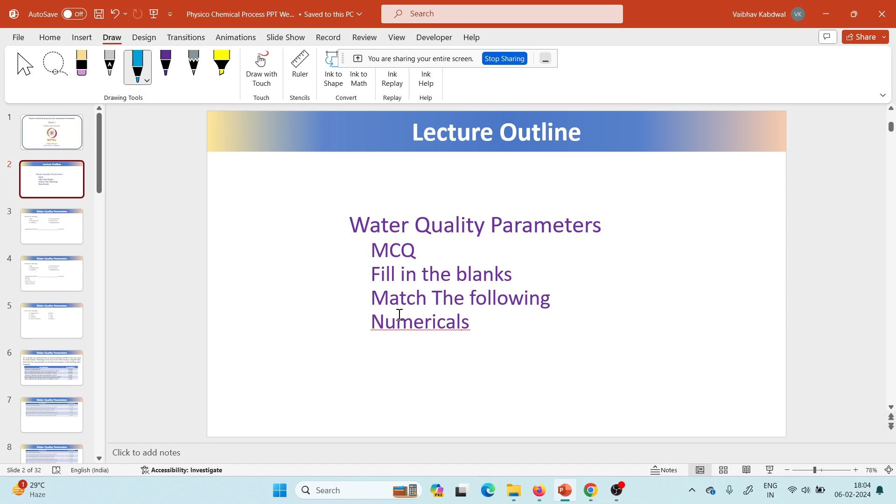We will study water quality parameters in this lecture. In the NPTEL lectures, Sir has taught water quality parameters, and I will solve some questions here. We will solve MCQ, fill in the blanks, match the following, and numericals. Shall we start? Yeah, sure, sir.

Okay, thank you. So did you watch the videos which Sir has uploaded? Yes sir, I watched some of the videos. I have previous knowledge, based on that I submitted my assignment. So are you a bachelor's, master's, or PhD scholar? Can I know? I am master's, I have a master's degree, sir, in organic chemistry. Nice. Okay, so good. We will start, I think maybe more people, if they want to join, they will join later.

So this is the question, as follows. We will see how to check pH, temperature, and turbidity, and through which instrument. So can you think of the first question?

pH can be measured through an ionic tester, sir. Correct. Turbidity through nephelometer. pH through ionic tester, temperature through thermometer, turbidity through nephelometer.

Correct. And temperature affects... there are actually four variables which can be affected by temperature. Can you think of those things? Dissolved oxygen. Yeah, correct, there are many things also. Maybe pH also may vary at temperature, I think it won't affect.

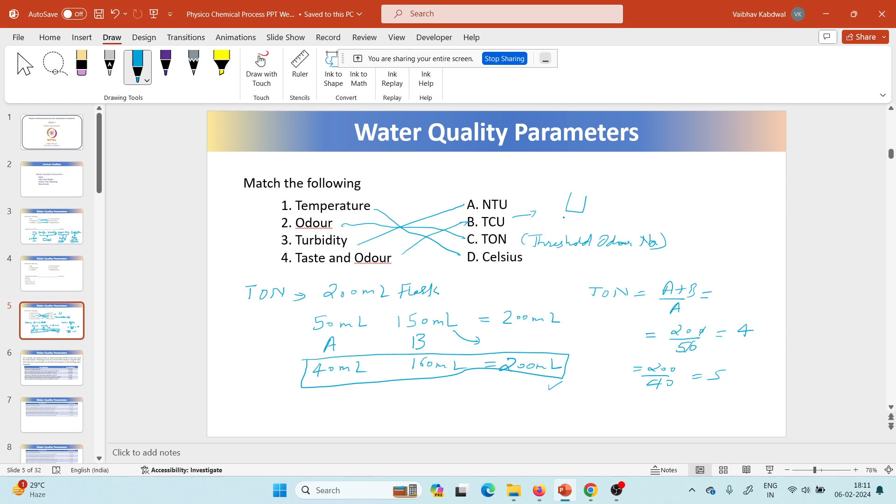Now we will solve one question. This is about solids. Do you know what solids are in water or wastewater?

They may be organic and inorganic solids. Correct, anything else? Organics, inorganics. Yeah, these are organics and inorganics. Dissolved and suspended - are you aware?

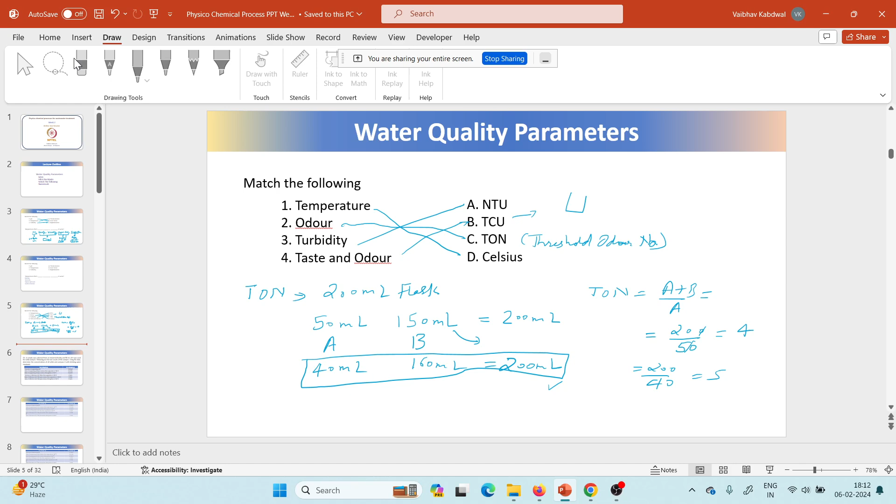Dissolved solids we can measure by means of specific conductivity. And suspended, how will you measure? I don't know, sir. Correct, I will tell you.

See, there are solids. Solids have a range that I have taught in previous lecture. So solids we can define as any impurity in water which can affect the water quality. So that's simply how I'm defining it.

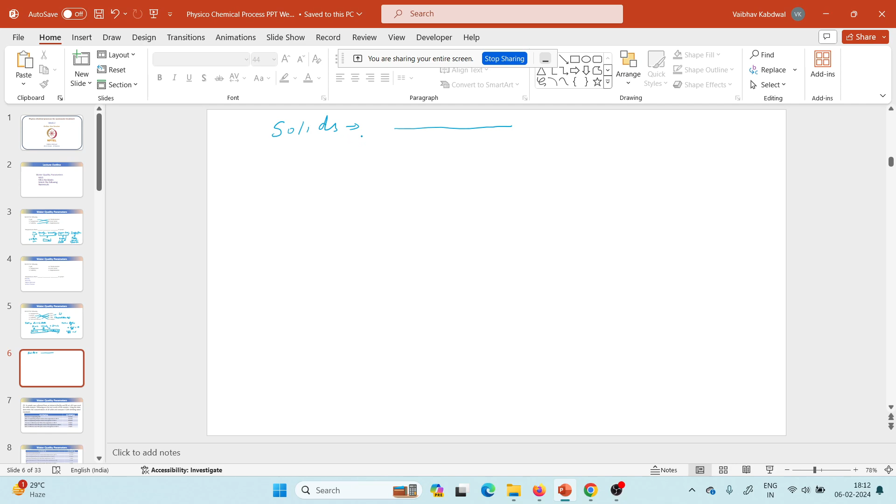Now we'll talk about the measurement. Solids, as we have defined, some are suspended solids and some will be dissolved solids. And we have defined further that suspended solids can be inorganic suspended solids, and it can be organic suspended solids.

Let me give you an example of inorganic suspended solids - let's say clay or sand. Organic suspended solids, can you tell me? Just like it can be leaf or any other thing.

Likewise, we have defined dissolved solids in two categories: inorganic dissolved solids and organic dissolved solids. Organic dissolved solids, let's say like sugar.

Inorganic dissolved solids, can you give the example? Urea. Urea is organic, not inorganic. Any salt you take, that is inorganic dissolved. Like sodium chloride, potassium chloride.

So how many varieties? One, two, three, four. We have a few more varieties. We will talk about those solids in the question itself. One, two, three, four, five, six - there are two more varieties left.

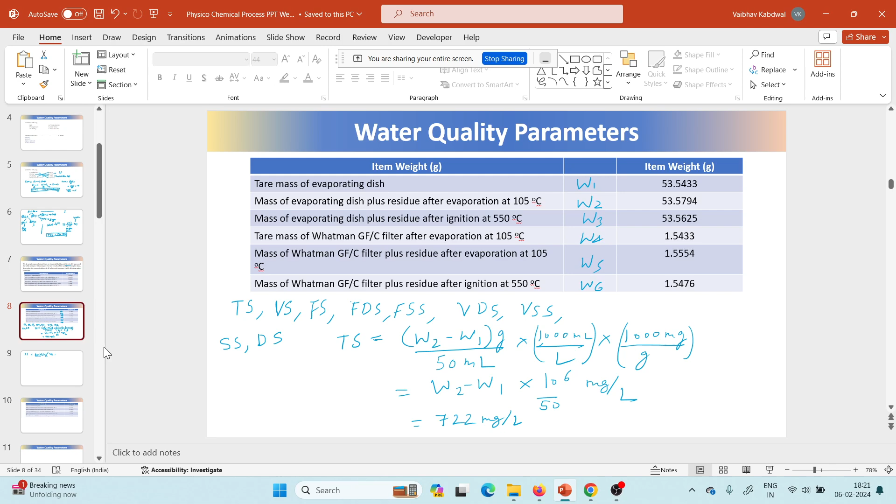Have you actually copied the question or not? No sir. Okay, 53.5625 minus 53.5433 - sir it's around 384, correct, correct. It is 384 milligram per liter.

Fixed solids are also called inorganic solids. Now we will calculate total suspended solids.

It will be W5 minus W4 into the same 10 to the power 6 divided by 50, milligram per liter. If you solve it, you will get 242 milligram per liter.

And if you solve the TDS, it will be total solids minus total suspended solids. It will be 480 milligram per liter.

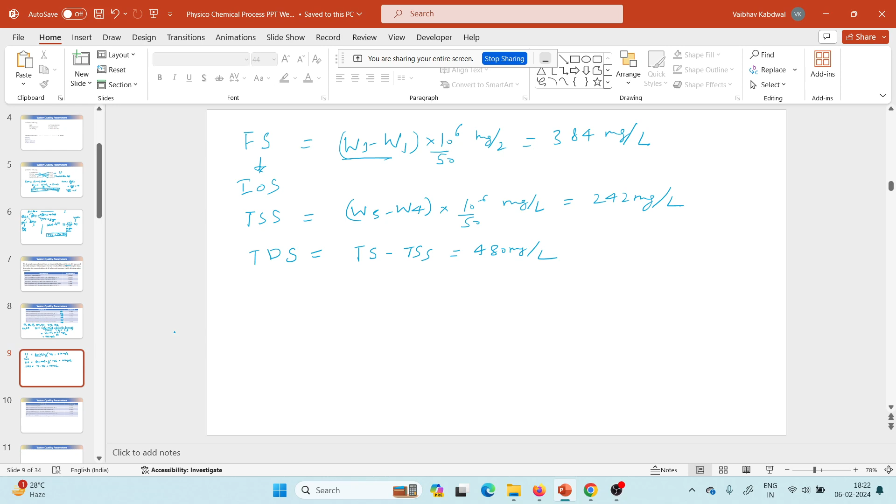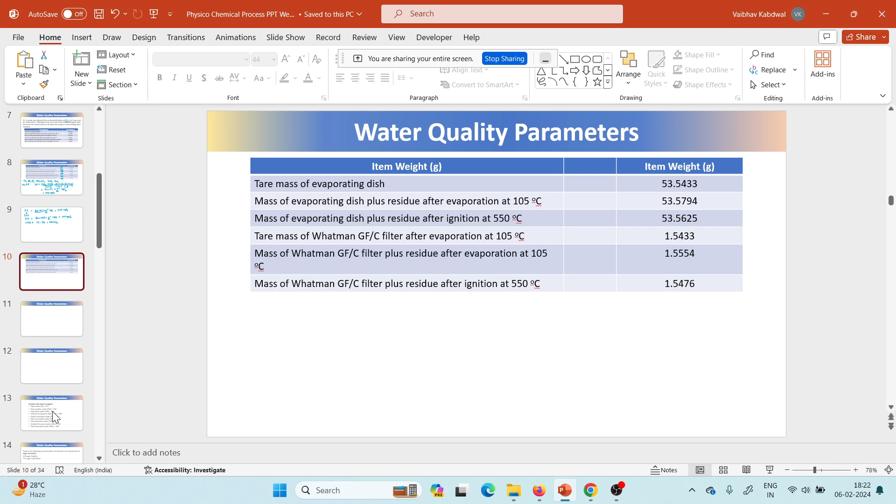Likewise you can do the rest - if you do it, it will take more time. So I have solved this concept now, I have told this concept, so if you use this concept, you can solve it and the answer you will get is also here. Otherwise you will lose interest if you solve too much. So this is the answer, you can match after that.

Okay, you will solve some small questions. So like this thing you can try: express the following concentration of elements and compounds as milligram per liter. These are actually compounds only, I have removed the elements. These are very easy, so can you try it?

No sir, okay I will try. So what we have to do is express the following concentration of compounds as milligram per liter of CaCO3. So we have to express it in terms of CaCO3. So how to do it?

There is a concept called equivalent. So what we have to do is find the equivalents of one compound, and that much amount of equivalent will be of CaCO3 only. So I will find first, I will calculate this.

Can you calculate the molecular weight of MgSO4? Just a minute, take 24 as Mg. Tell me this. 120 sir. Yeah, so it will be 120 grams.

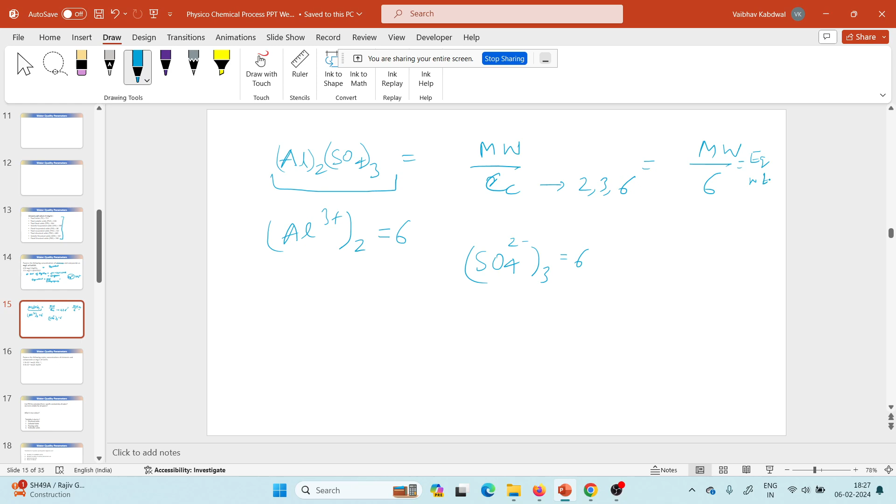It will be the equivalent weight of Al2(SO4)3. Understood now? Yes, sir. So likewise, we will solve one question.

So for this, it will be 120 divided by how much? 2. It will be 60. 60 grams. Now we will calculate the number of equivalents, that is equivalent weight.

For MgSO4, sir, or Al2(SO4)3 types? No, first we will do it for MgSO4. Al2(SO4)3, I just told for reference how to calculate. For MgSO4 only.

Hi, yes, I can hear you. Hello. If you have doubt, you can text also. Hello. Yes, yes, yes. Then, yes, sir. So shall I start? Yes, sir.

Okay, so equivalents. We have calculated the equivalent weight. Now we will calculate the number of equivalents or gram equivalents. It is sometimes called equivalent or sometimes gram equivalents.

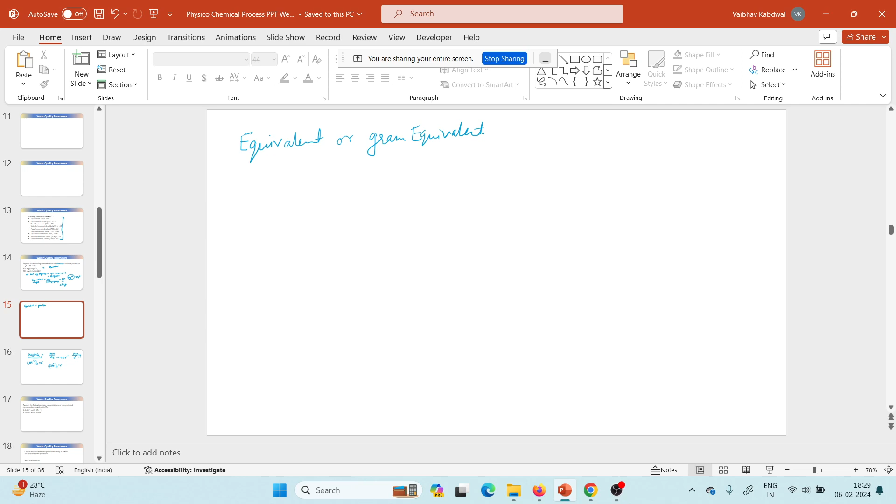Gram equivalents is given weight divided by equivalent weight. For MgSO4, the given weight was how much? It was 420. So we will take 420 and divide it by equivalent weight.

How much was it? 60 now. So it will be... but it was in milligram, we have to take care of that.

7, I think. Yes, sir. 7 into 10 to the power minus 3. So it will be equivalents, or we can write it as 7 milliequivalents. Understood? Okay, sir. And then we have to convert it in the form of CaCO3.

So we have 7 milliequivalents of MgSO4. Same 7 milliequivalents we will have for CaCO3. Okay, sir. So now we need to calculate for CaCO3.

So what is the molecular weight of CaCO3? 100. 100 grams or milligrams? Grams only, 100 grams. What is the equivalent weight? 100 divided by 2, it will be 50 grams. So in one equivalent, there will be 50 grams.

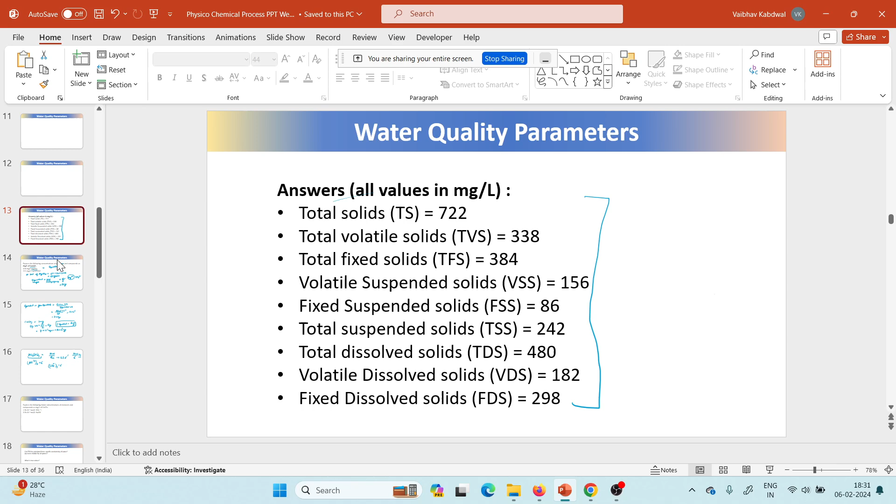So in 7 milliequivalents, it will be 7 into 10 to the power minus 3. I'm writing it in the form of equivalents, and then 50, and then converting it in the form of milligram. It was 420 milligram per liter. So 10 to the power minus 3 will cut and it will be 350 milligram per liter.

Fine. So now can you solve the same for this thing also? 221 milligram per liter of Ca(HCO3)2. It's easy only. Take 1 or 2 minutes and try to solve.

So what is the molecular weight of Ca(HCO3)2? I'm calculating, sir. Correct, correct. Good. It's around 161, sir, 162 I think. Can you cross check it again? Yes, sir, it's 162.

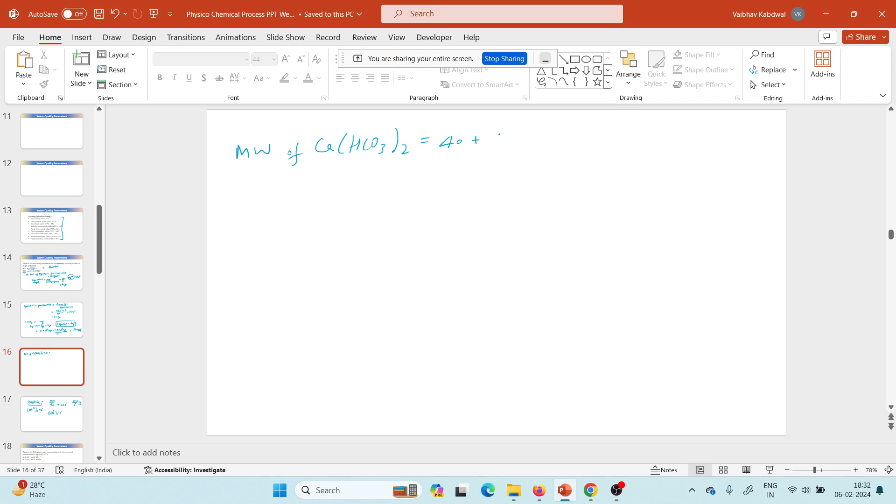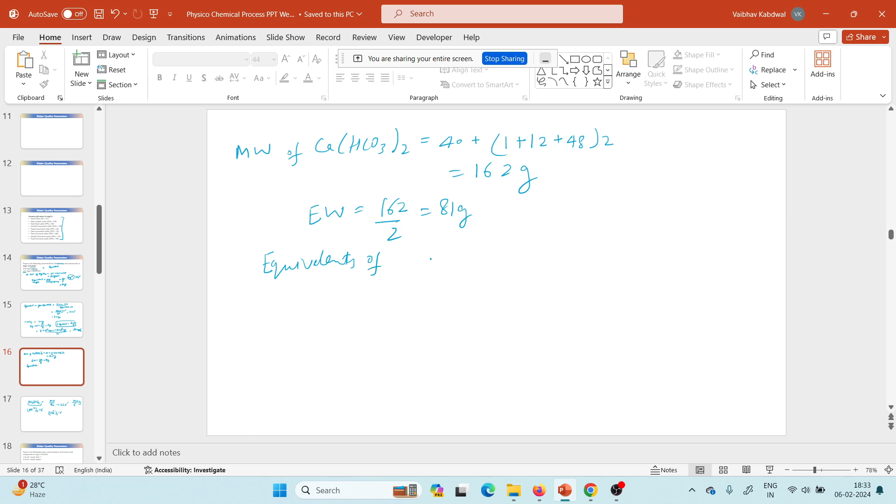Plus 60. 162. 81. 2 point.

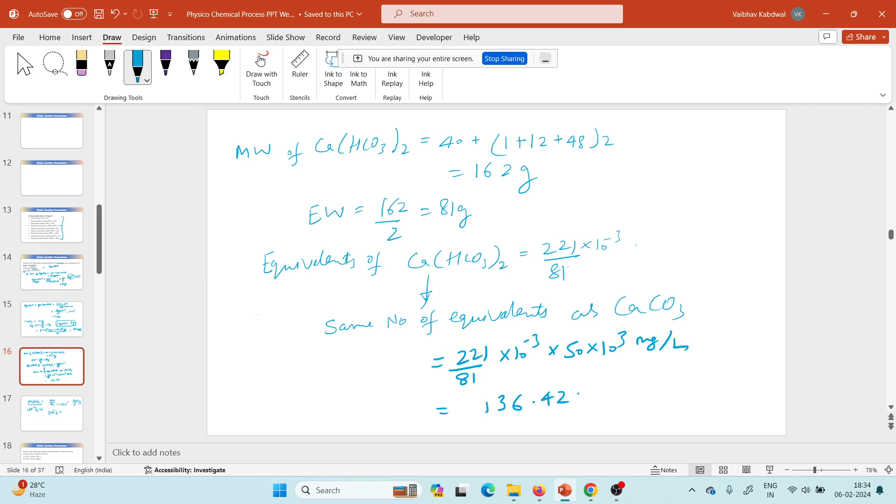Have you calculated? Check. Yes sir, correct.

Okay, so likewise we will solve this also. We have to solve it in the same manner. Express the following molar concentrations of elements and compounds as milligram per liter. I've removed the elements, otherwise it would be big. So for these compounds, we need to calculate the same thing.

It is easy here because we know one formula: normality equals combining capacity into molarity. Can you tell what is this thing? Cc is actually combining capacity, which we studied previously. So if you know the molarity, you can convert that into normality by multiplying it with combining capacity.

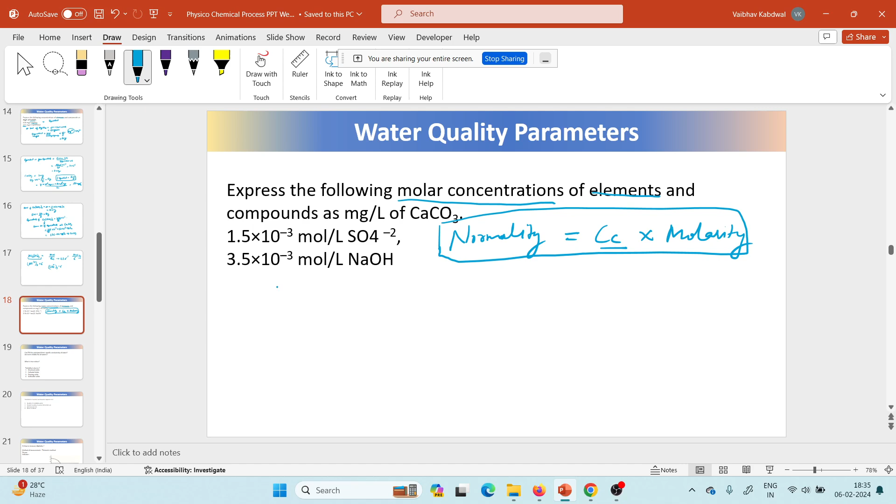So for SO4 2-minus, combining capacity will be 2, and normality will be 2 into 1.5 into 10 to the power minus 3, which is 3 into 10 to the power minus 3. Normality units are in normal.

It will be 150 milligram per liter. Okay sir, correct? For the other question, wait, I will add one more.

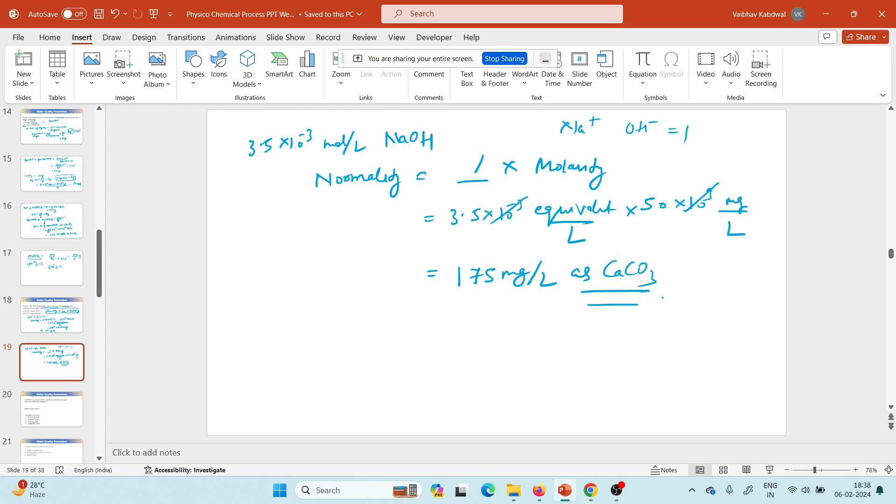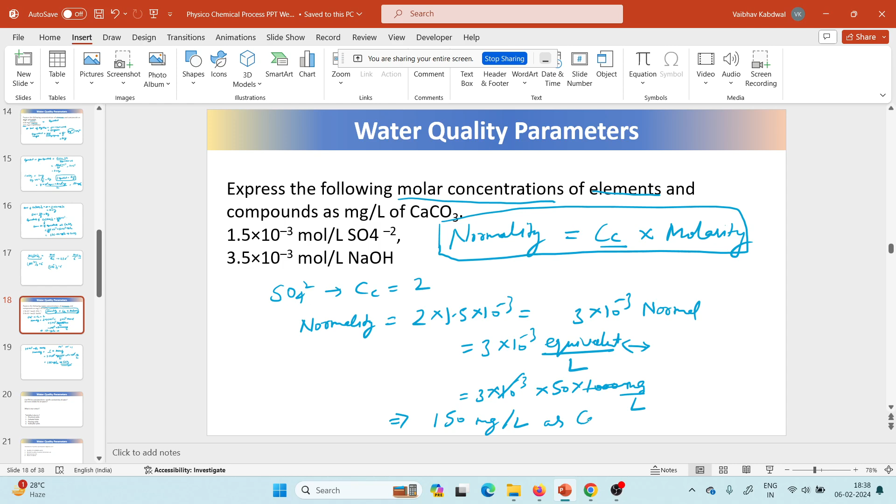If we don't define it as CaCO3, then our answer may not be correct. So it should be written as 150 milligram per liter as CaCO3.

Then these are some small questions that you must read. Can TDS be calculated from specific conductivity of water? Yes sir, it's true. And what about the second question: are tests reliable for all waters?

I didn't understand the question, sir. First question, did you understand? Yes, sir. I am not understanding the second question. Okay, okay, that's why it is there. Okay, I will tell.

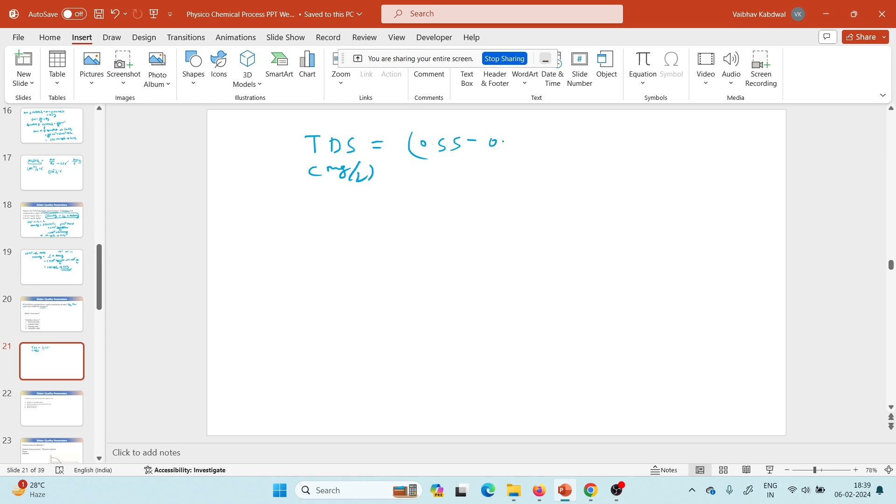See, TDS, how will we calculate? We will calculate TDS in milligram per liter by multiplying it with a factor which ranges from 0.55 to 0.7 into specific conductivity. Okay sir, correct? Sir, I think it's 0.6 something.

Yesterday I have answered it. Yeah, it's 0.67, but for different waters and different ions, it will vary. So specific conductivity is micromho per centimeter, that is, or millimho. That I am not sure.

So the thing is that there is a limitation not with specific conductivity but with TDS, because what will this term tell? It will tell us the ionic species concentration.

So what we have studied, TDS will contain inorganic dissolved solids and organic dissolved solids. So what will specific conductivity measure? It will measure only inorganic dissolved solids. Understood somewhat? Yes, sir. So it will tell only inorganic dissolved solids, and organic dissolved solids will not be counted here.

So that's why in those waters where inorganic dissolved solids are more and organic dissolved solids are less, there we can use it. But in our wastewater, organic dissolved solids are more, so we can't measure TDS through this equation.

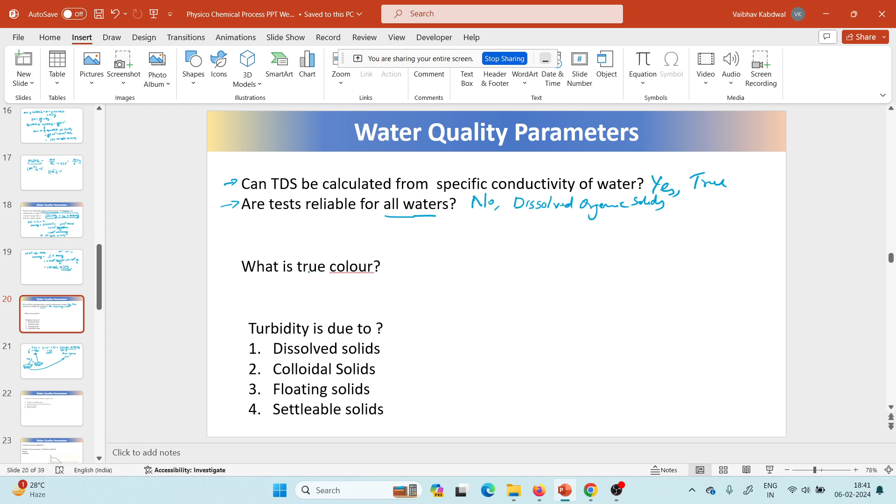What is true color? Do you know? No, sir, we will measure the color by comparison method, haven't seen it, sir.

In water or wastewater, there are two types of color: one is apparent color, and another is true color. True color is only due to dissolved solids. Water can have dissolved solids and suspended solids. Apparent color is due to both dissolved and suspended solids. So if we remove the suspended solids, we will get the true color.

Turbidity is due to suspended solids, but not all suspended solids cause turbidity. These are specific solids called colloidal solids, and colloidal particles will cause turbidity through scattering. Floating solids like leaves and other materials in wastewater will not cause turbidity.

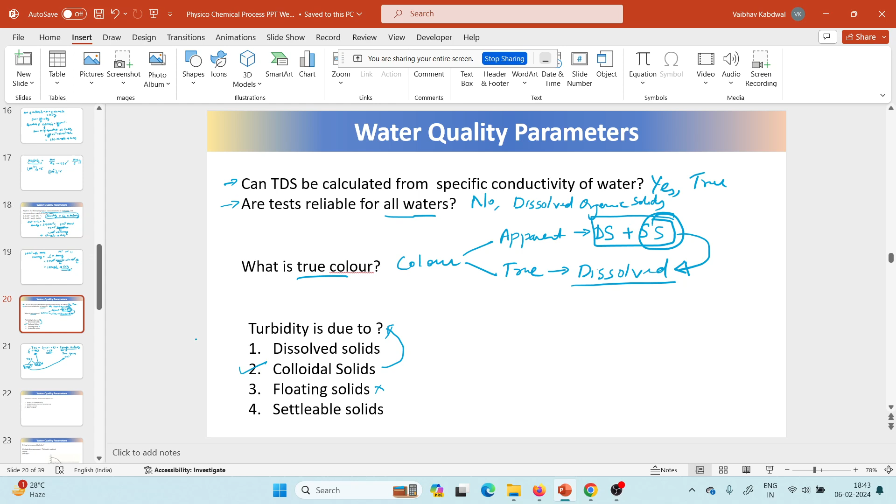Do you know how to measure alkalinity and what is alkalinity actually? The neutralizing capacity of water, acid neutralizing capacity.

Do you know how to measure it? Yes sir, titrimetric method we use. Which titrant do we use? Sulfuric acid. How much do we use generally? 0.02 normal H2SO4. Indicator? For hydroxide alkalinity, it is phenolphthalein.

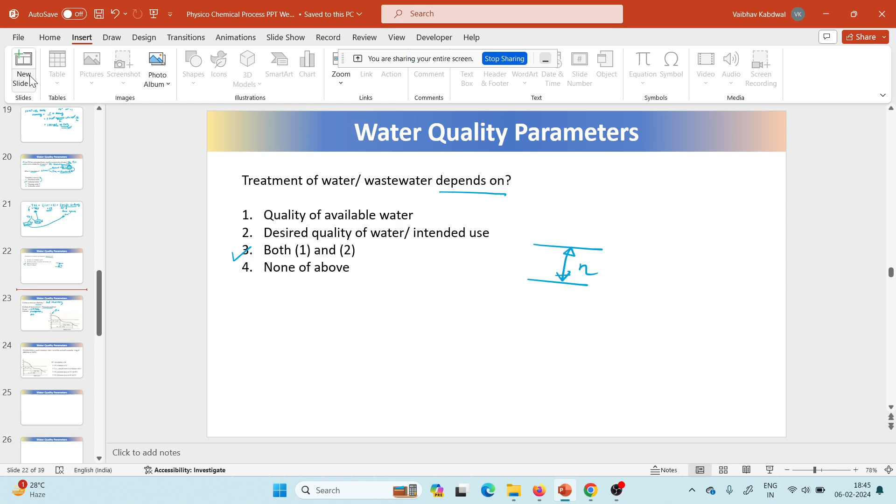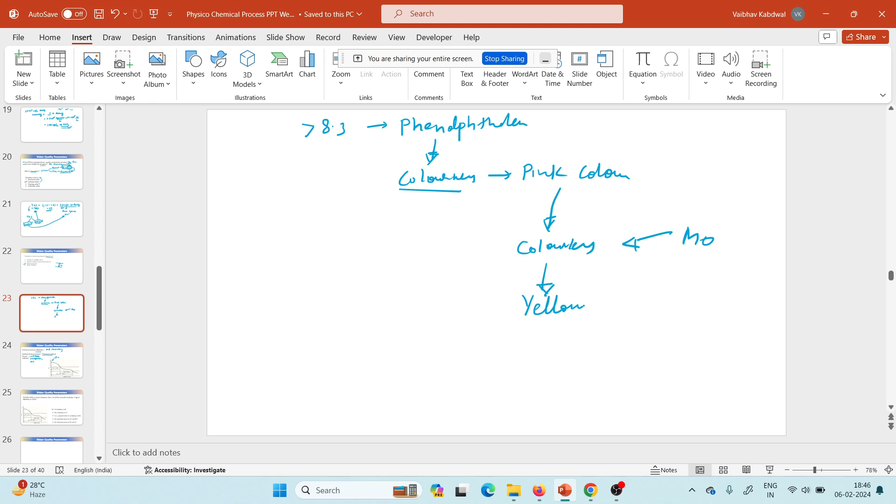So what we use in general: we add phenolphthalein alkalinity, denoting it as P. It will turn if the pH is more than 8.3, even though if it is not more than 8.3, we will add phenolphthalein. Phenolphthalein will commence with hydroxide and give pink color if water is colorless and pH is more than 8.3. After titration, the pink color changes to colorless. So we will titrate it with 0.02 normal H2SO4, the pink color will turn into colorless, and then we will add methyl orange. Then the color will change to yellow, pale yellow in color, and then we'll titrate.

Just a minute sir. Hello sir, okay. Okay sir, I understand it sir. So from pale yellow it will convert to orange or reddish tinge color, sir. Orange, or a little bit light pink. So this is the procedure.

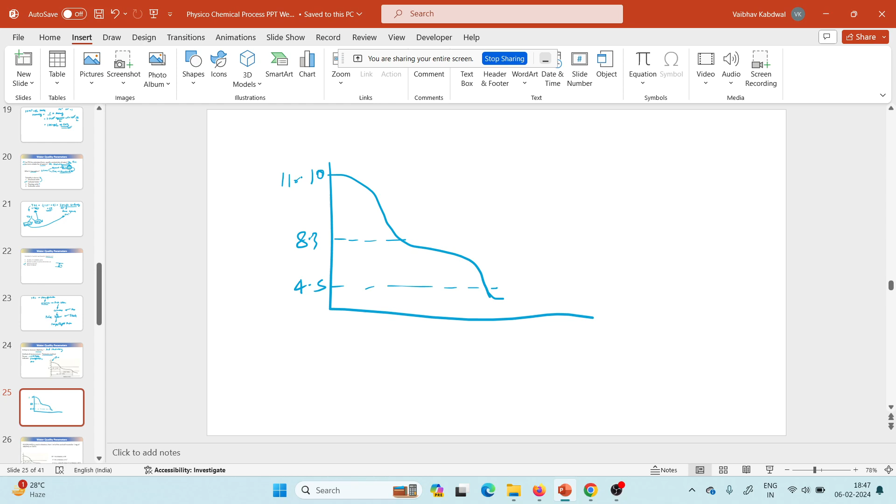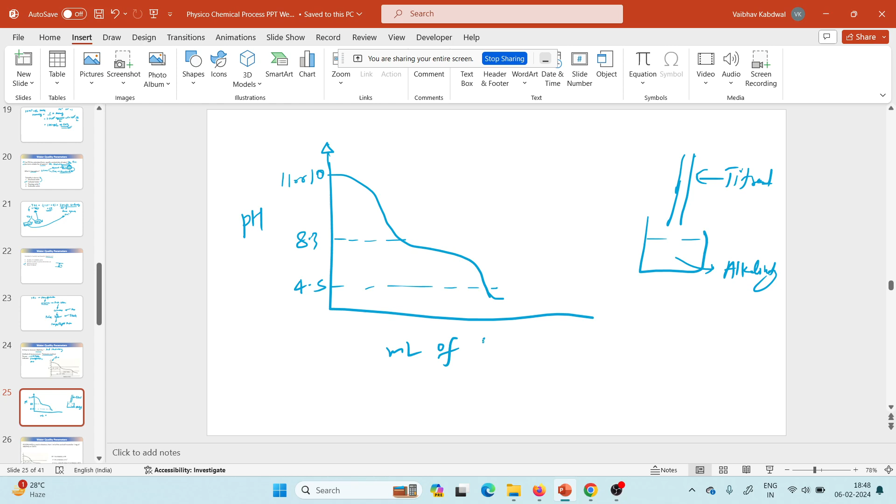I will teach this with a graph. First we add phenolphthalein, then we add methyl orange. This pH will be 8.3, this point will be 4.5. This will be around more than 8.3, let's say around 10, 11, or over 10. On the y-axis we measure pH, and we measure the volume of titrant used on the x-axis. So this water will have some alkalinity, measured in ml of titrant used.

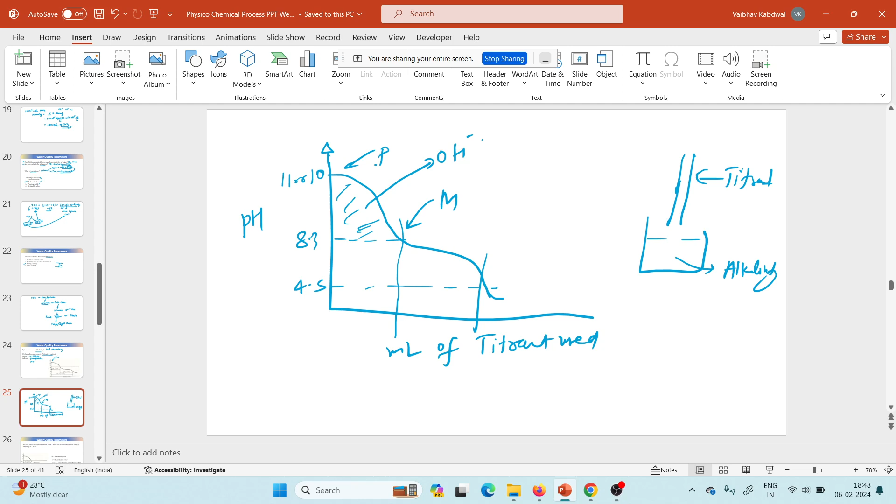So we will put phenolphthalein, then we switch to methyl orange when the phenolphthalein color disappears. In this first region, only OH minus and CO3 2-minus alkalinity species are present. In the next region, bicarbonates are present as HCO3 minus. The amount of H2SO4 consumed in the first region is called phenolphthalein alkalinity, and from phenolphthalein region to the end, it is called methyl orange alkalinity. The total alkalinity M is taken from initial to final; this is also called total alkalinity.

One more thing let me tell you. So here pH will be 8.3... oh no, let's say pH is around 11, then 8.3, then it will be 4.5.

So this we call as P, phenolphthalein. Then we call this as M. And now we'll talk about species. So here we will have OH minus hydroxide and CO3 2 minus, and here it will be bicarbonates.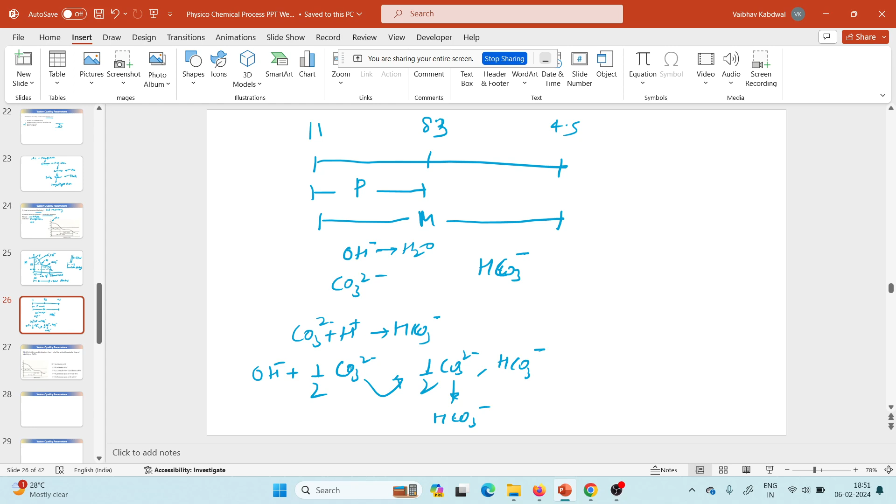OH minus will be utilized, OH minus alkalinity will be neutralized, but only half of the CO3 2 minus will be utilized. And here in this region, half of the CO3 which is produced from this will be here, and HCO3 minus will be there. So this will be in the form of HCO3 only. Understood? So like this will be depicted.

And one more thing, for the ease of calculation we use this concept. This is important: if 0.02 normal H2SO4 is used in titration, then 1 ml of that 0.02 normal acid will neutralize 1 milligram of alkalinity as CaCO3. So we will use this concept in questions.

Are you aware of these things? P is equals to M, P is equals to M by 2, P is equals to 0. No sir, okay then I will tell you. Actually it is similar to the concept which you have explained sir. Yeah, it will be P.

Is OH equal to OH? That means all the hydroxide ions will be neutralized. M by 2, since half of the CO3 is converted into HCO3, that's why I think it is used M by 2. Wait, I will tell from starting itself.

Okay, we'll start from P is equals to 0. P is equals to 0 means phenolphthalein alkalinity is 0. It means when we add phenolphthalein, the color will not change to pink. So that means only HCO3 is present, only this part will be present in this case. Understood na? Yes sir.

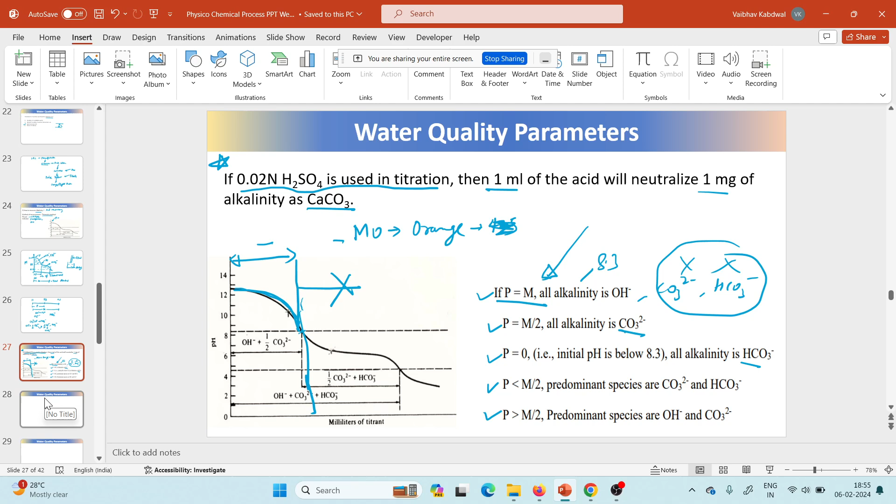The pH will be around 8.3 only in this case. So this is about alkalinity, and we will solve few questions.

Yeah, this is a question of alkalinity. A 100 ml sample of water is titrated with 0.02 normal H2SO4. So this is the sample we are titrating with 0.02 normal H2SO4.

The initial pH of water is 9.5, pH is on the y-axis. 6.2 ml of acid is required to reach pH 8.3. So how much ml is required? I will write it on the x-axis: 6.2 ml is required for this phase, and an additional 9.8 ml is required.

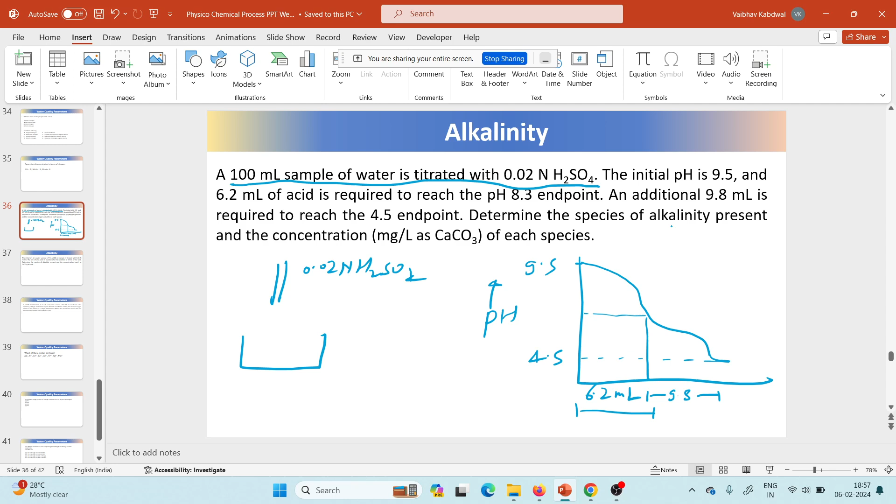9.8 ml is required to reach the 4.5 endpoint. Determine the species of alkalinity present and the concentration of each species. So can you solve? Can you try to solve? Okay, I will do: 6.2 into 0.02 into 50 into 1000 by 100.

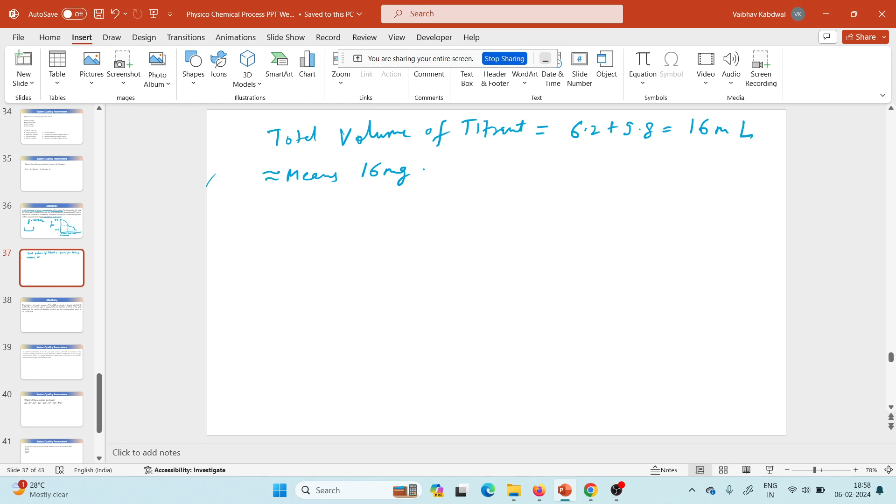500 into 6... 160, sir. Yeah, total. It is total alkalinity now. 160, 16 divided by 100. That will be 160 milligram per liter, 160 milligrams per liter.

As CaCO3, that we have to write. So this is OH minus plus CO3 2 minus plus HCO3 minus. The sum of these three will be 160 milligram per liter. Then how to calculate these three individual alkalinity species?

So what is the initial pH? 9.5. So initial pH is 9.5. What will be the pH? From this pH, we can calculate the OH minus alkalinity. 14 minus 9.5 will be how much? 4.5, I guess.

Yes sir, and then OH minus will be 10 to the power minus 4.5 into 50 milligram per liter. How much will it come? Can you calculate and tell? That will be 50 into 1000 because it will be in gram.

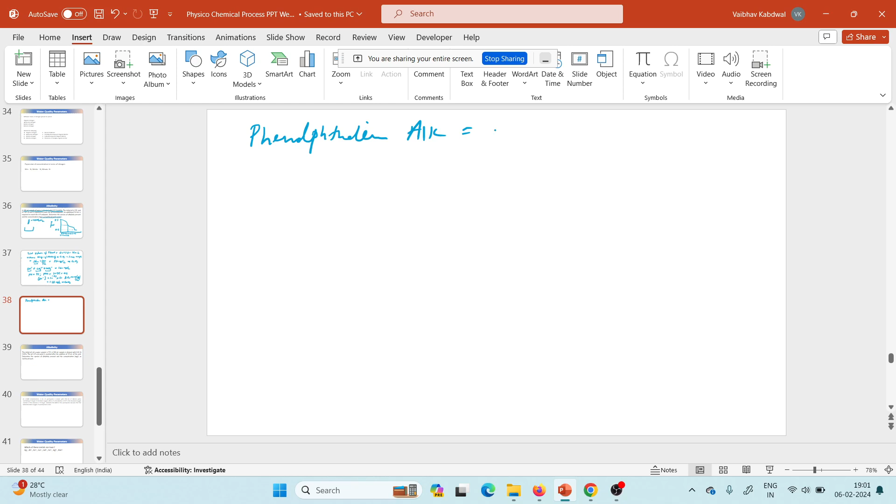So for phenolphthalein alkalinity, how much volume was consumed? 6.2 ml. So this will calculate. So for phenolphthalein alkalinity, how much will it contain? It will contain OH minus plus half of CO3 2 minus, which will be present in phenolphthalein. So what we will do is calculate this much amount of phenolphthalein alkalinity.

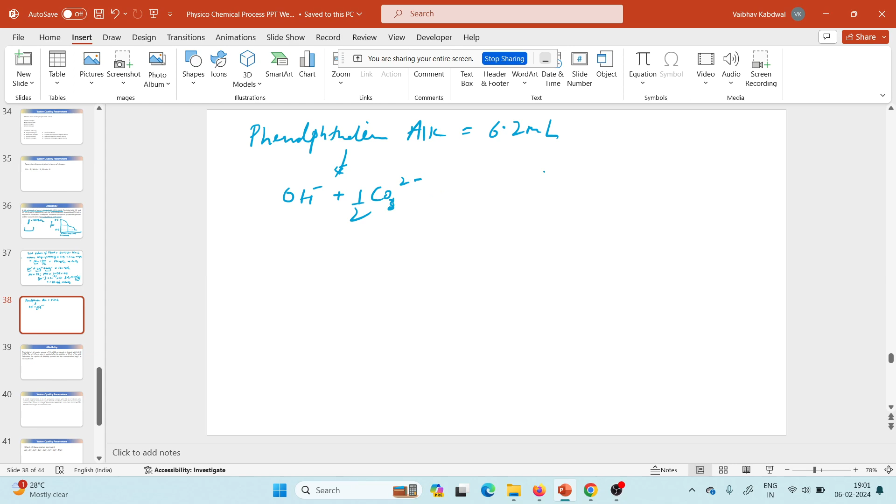How much will it be? 6.2 milligram by 100 into 1000, so it will come as 62 milligram per liter. So if I calculate CO3 2 minus alkalinity, it will come as 62 minus 1.58 into 2, that means it will be 120.84 milligram per liter.

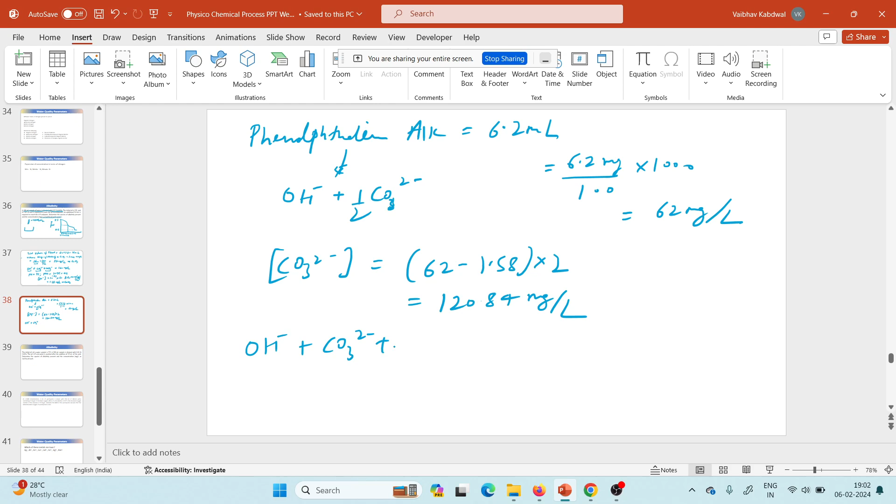It will come as 37.58. Okay, yes sir. So this question is complete here. This is HCO3, this is CO3. Bracket will not come in here, bracket is not required. So this is HCO3 here, this is CO3, and OH minus we calculated here.

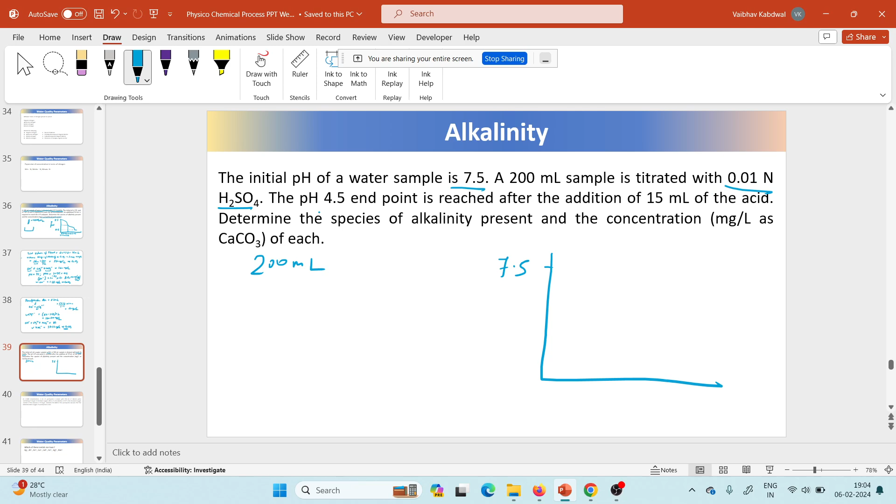Now we will solve one more question on alkalinity. The initial pH of water is 7.5. 200 ml sample we have taken. It is titrated with 0.01 normal. See, this is the change here. Yes sir, earlier we used 0.02 normal, but now we are using 0.01 normal. And the pH 4.5 endpoint.

15 ml is consumed, 15 ml is utilized. Can you calculate the total alkalinity? And one catch is there, two things to note. One thing is that pH is less than 8.3, so that means OH minus and CO3 minus will not be present.

Okay sir, second thing is 0.01 normal of H2SO4 they have taken. So we can't use the line we studied, like 1 ml utilized will be equivalent to 1 milligram of alkalinity as CaCO3. This will not be applicable here. Okay, we will do it. First, we will calculate the total alkalinity.

Can you calculate? I will simultaneously calculate. 15 into 0.01 into 50 into 1000. So total volume is 100 ml or 200 ml? 200 ml.

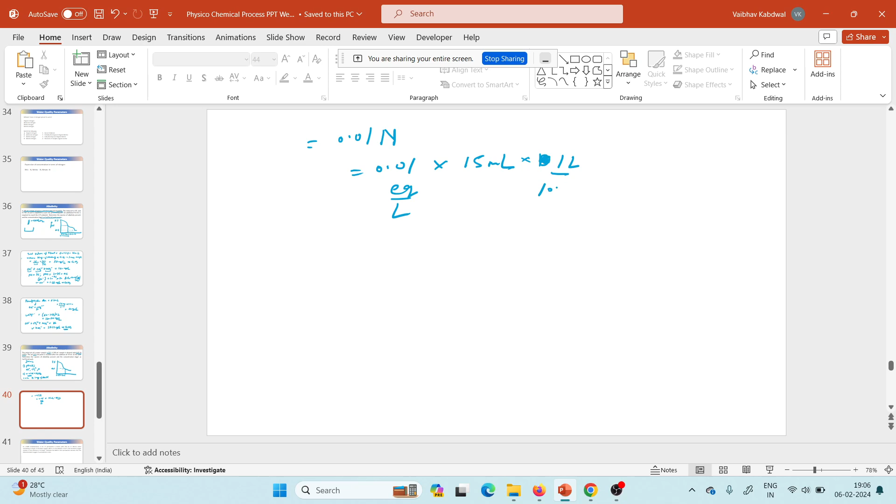37... yeah correct, 37.5 I think. So 0.01 normal is there na, so we will multiply it with 0.01 and by 15 ml to calculate the equivalents. That 0.01 is equivalent per liter, and we'll multiply by 15 ml, 1 liter by 1000 ml. We will calculate, so it will have 0.15 milliequivalents.

So the same equivalents of alkalinity will be there: 0.15 into 50. How much? It will come as 37.5 milligram per liter as CaCO3. It's easy, I think. Yes, correct. And one more thing to tell here: we calculated the total alkalinity, I'm writing it as Ta. It is in the form of HCO3, HCO3 minus.

It is in the form of HCO3 minus. Yes, so total alkalinity in the form of HCO3. But we have pH also.

Can we calculate OH minus? You will get to know how much the pH was. pH was 7.5, so pOH will be 6.5. And then OH minus ion concentration will be 10 to the power minus 6.5.

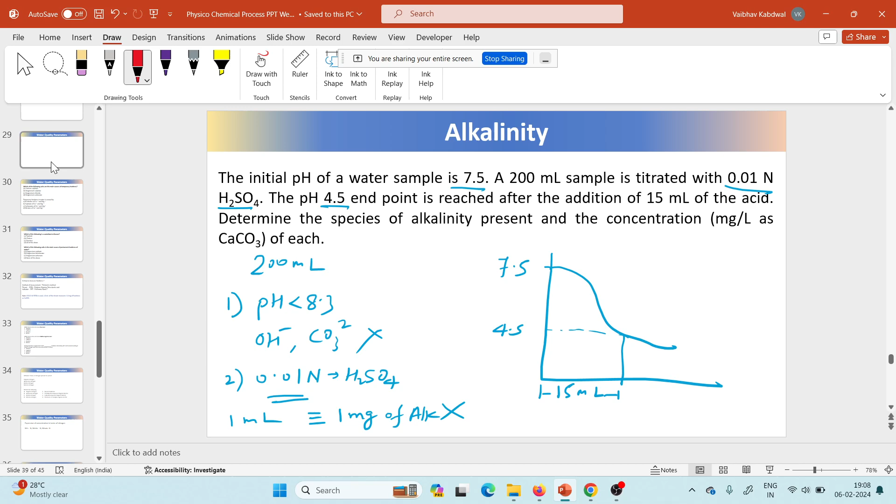Now we will again study this, alkalinity, yeah, there are some MCQs. Have you studied hardness? Yes, sir. So hardness is mainly due to calcium and magnesium salts. Why not sodium?

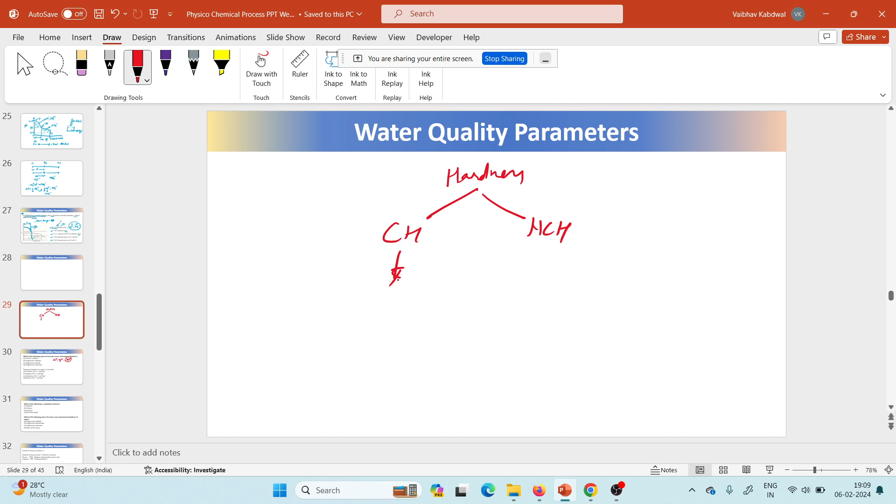Actually, it is imparted by multivalent cations, that's why sodium does not impart any hardness. And hardness is of two types: one is carbonate hardness and one is non-carbonate hardness. Carbonate hardness is also called temporary hardness, and non-carbonate hardness is called permanent hardness.

So the anions which are associated with calcium and magnesium, what are those? Chloride, sulfates, nitrates? Nitrates are not there, sir, it's chlorides and sulfates, but sometimes nitrates are also present. So CO3 2 minus, HCO3 minus, these are the anions which will cause temporary hardness, and it is called temporary hardness.

Now you can solve the MCQ. And one more thing, temporary hardness can be removed or eliminated by heating or boiling, are you aware?

And why is it important to study hardness? Because in drinking water, it is not much of a concern. In industrial water, it may cause sludges or scale formation. This is the main thing.

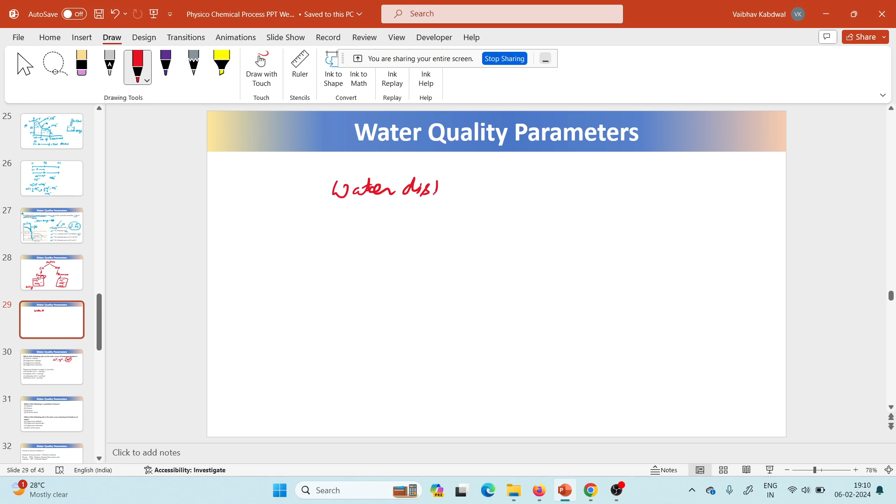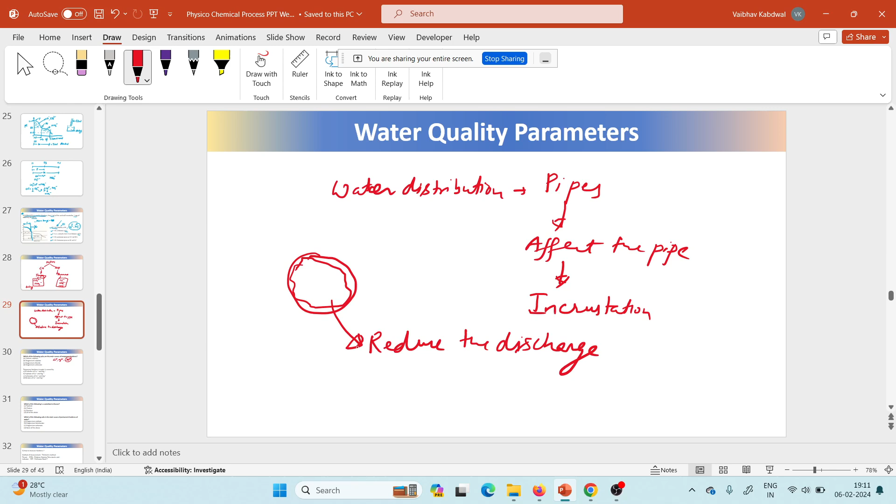And one more thing, if hardness is present in water distribution, we use pipes, and it will affect the pipes, causing incrustation. Means, suppose this is a pipe, it will form a layer and reduce the discharge carrying capacity. So then we have to replace the pipes again and again. So in order to reduce the cost of changing the pipes, we better don't send water with high hardness.

Understood? Yes, sir. So now you can solve the questions. Which of the following causes temporary hardness: calcium sulfate, magnesium sulfate, magnesium chloride, or bicarbonates? Temporary hardness means it is bicarbonates, sir, carbonates. Option D is correct.

This question: temporary hardness in water is caused by bicarbonates of calcium, magnesium. Yes, sir, option A. Option A and B also, sir. Option A and C for the second one. They are asking temporary hardness, carbonates.

Which option? I thought it was bicarbonate. It is nitrates. Okay, option C is correct. So nitrates will cause permanent hardness.

Read this: which of the following is a waterborne disease? Typhoid, cholera, diarrhea, all of the above - correct. Which salt is the main cause of permanent hardness of water? Magnesium sulfate, correct, the first one is the answer.

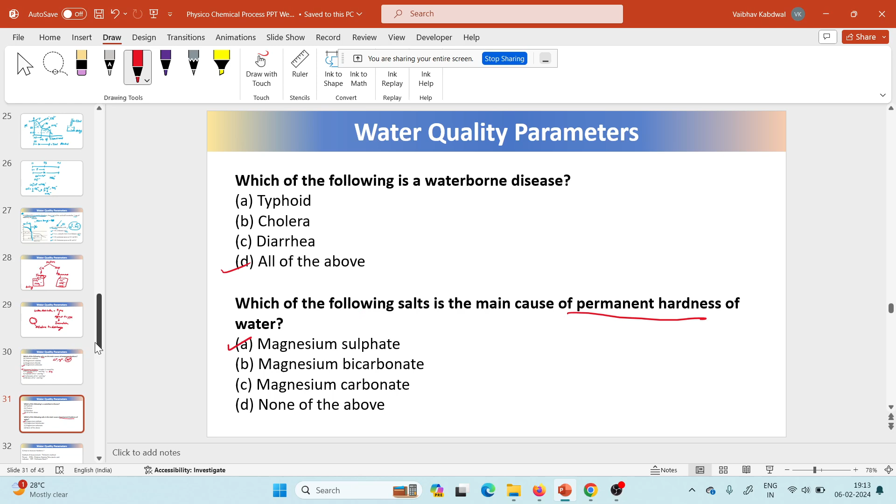How to measure hardness? By titrating with EDTA using EBT indicator, and if we use ammonia buffer to increase the pH. Note that if 0.01 molar EDTA is used, then 1 ml of titrant measures 1 milligram of hardness.

Like we studied in alkalinity, this is the same equivalence concept through which we have formulated this, but note, shall I write how these equations are? I will write, it will not take much time.

So what happens now? Calcium, magnesium ions present in water will react with EBT and form a calcium magnesium metal-EBT complex. It is a wine red color complex.

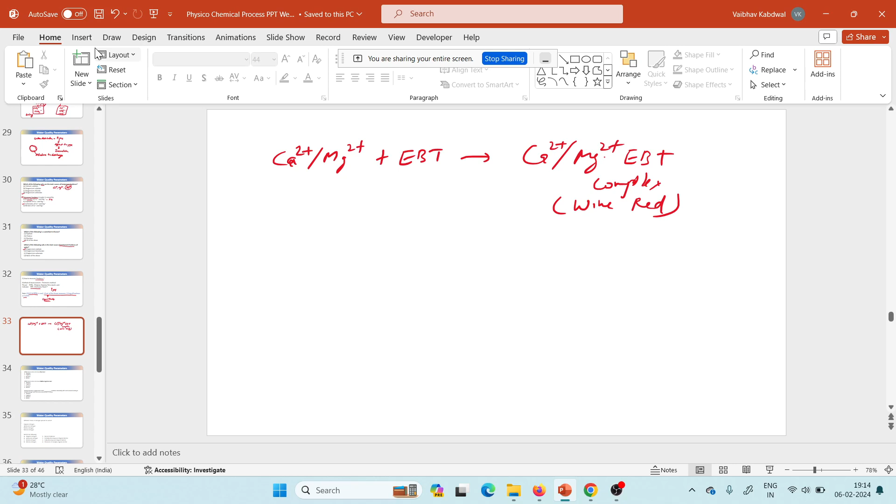This is EBT, the indicator. So after putting a few pinches of indicator, we will titrate it with EDTA.

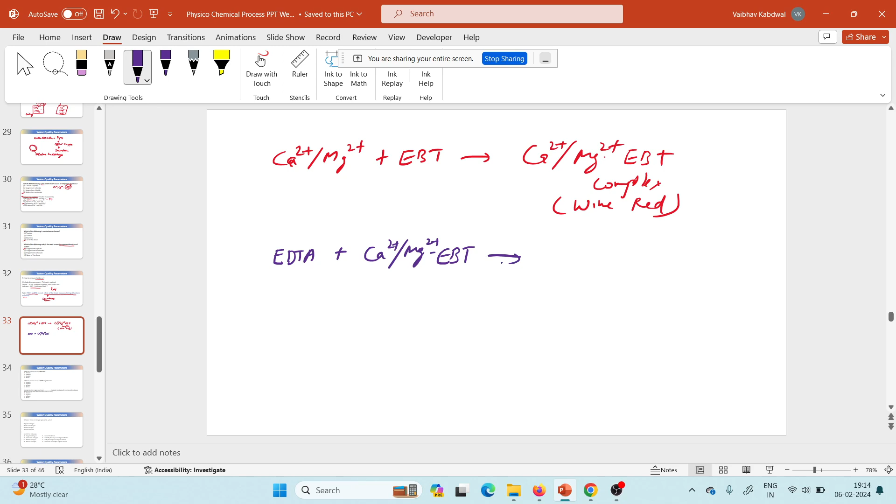EDTA, when we titrate it with calcium-magnesium complex, a displacement reaction occurs. The calcium and magnesium will attach and form a more stable complex with EDTA, forming calcium-magnesium-EDTA.

That EBT will give its color when available in the water. This will be colorless, and this will give its blue color. This blue color will tell us that this is the end point of the titration.

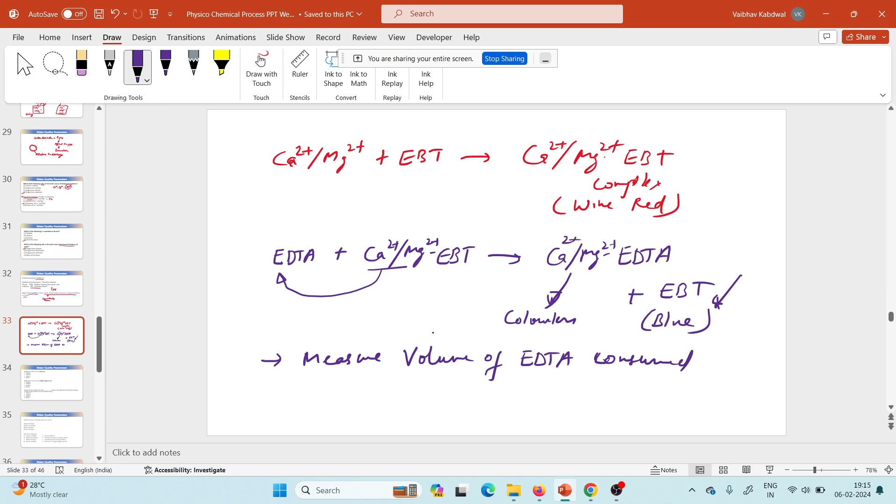We will measure the volume of EDTA consumed, in mL. If V mL is consumed, then V milligrams of hardness is present in that much amount of the water sample.

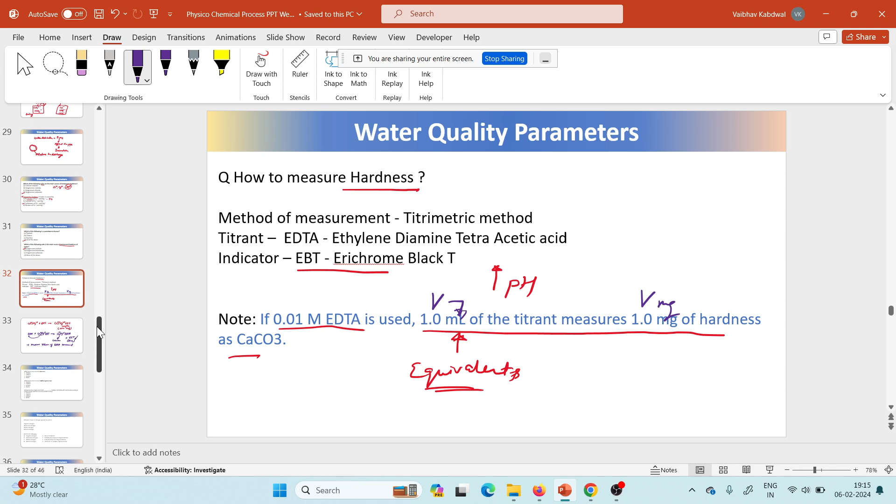Okay, so now some more MCQs are here. Fluorosis - option 3 is correct, fluoride. What do you know about it?

Methemoglobinemia, caused by nitrates. Do you know the other name for methemoglobinemia? Blue baby syndrome, correct. How does it happen?

During pregnancy, ladies may be affected by high nitrate content in water. The born baby will be dark blue in color. This may lead to miscarriage.

The nitrate which is present - if they consume nitrate, the nitrate will be converted into nitrite, and nitrite is very toxic.

So nitrite will combine with hemoglobin. Normally hemoglobin carries oxygen, but NO2 has more affinity towards hemoglobin, so HbNO2 will form and it will not take oxygen. Because of the lack of oxygen, the baby becomes blue.

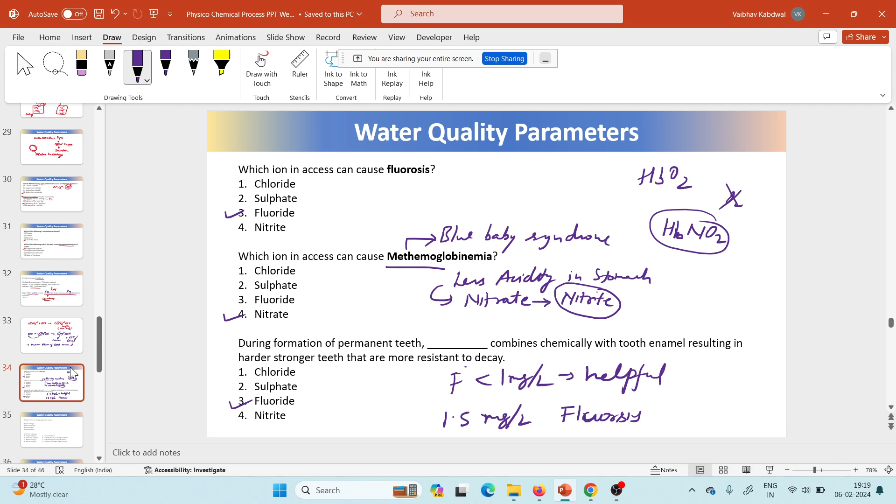Read this question: different forms of organic nitrogen present in water. Are you aware of it? Different forms - ammonical nitrogen, nitrate, and nitrite. I didn't know about organic nitrogen.

You initially told me urea. Urea is organic nitrogen. Okay sir, correct, this is organic nitrogen.

So what are these different organic forms - when we discharge, let's take an example, it will be easy to understand. See, suppose this is a river.

So there is a sewage treatment plant. Let's not take that example - let's take a community which is discharging its sewage here.

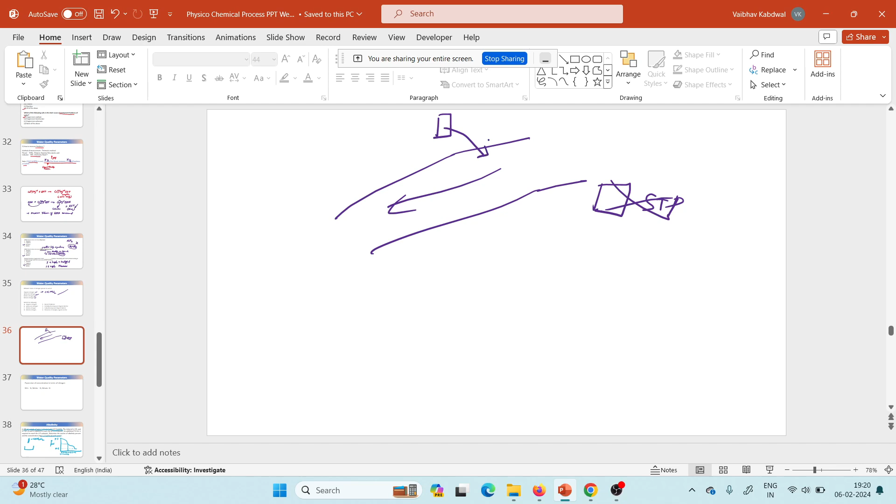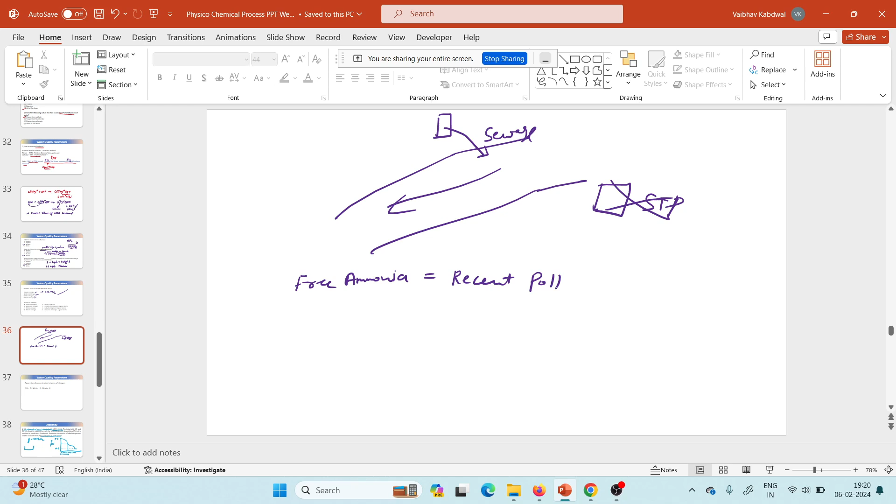If sewage is in the initial phase, it will contain free ammonia, which describes recent pollution. Near this, near the point of disposal, you will get ammonia or ammonium.

But as the sewage moves with the stream, after some time, if you measure at some other section downstream, you will find nitrite because of oxidation - free ammonia will oxidize to nitrite.

Nitrite indicates partially decomposed organic matter. Let's correct the spelling.

And what about nitrate? Partially decomposed organic matter, when further oxidized, becomes nitrate, which indicates fully oxidized organic matter.

Nitrite is very toxic - its limit is zero. Nitrate is not toxic, so its limit is 45 milligram per liter as nitrate only. If you take it in terms of nitrate nitrogen, its limit is around 10 or 11, in the form of NO3-N - I'll talk about these two things later.

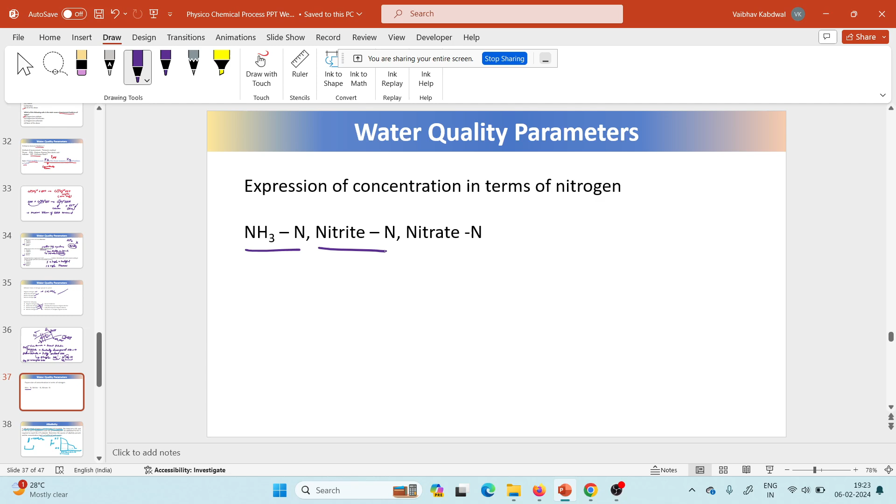So are you aware of this - nitrate nitrogen, nitrite nitrogen? No sir, I didn't know this.

So what is the molecular weight of ammonia? 14 plus 3 equals 17. So for ammonia it is 17.

For nitrite, how much will it be? 14 plus 16 into 2, that's 32 plus 14, giving 46. Now tell for nitrate also - 48 plus 14 equals 62.

These are all in grams. So instead of nitrogen, we are taking hydrogen also here, and 2 moles of oxygen here, and here we are taking 3 moles of oxygen also. So what we do is express all these in the form of nitrogen only.

So suppose if 17 grams of ammonia is present, we denote it as 14 grams only. If 46 grams is present, we take it as 14 grams itself. And if 62 grams of nitrate is present, it equals 14 grams of nitrogen. We won't consider oxygen and hydrogen in that case.

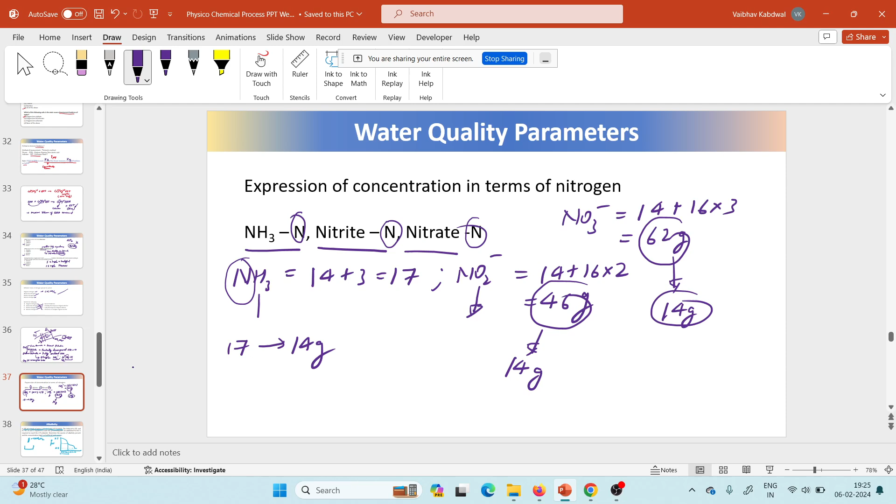And these questions we have solved.

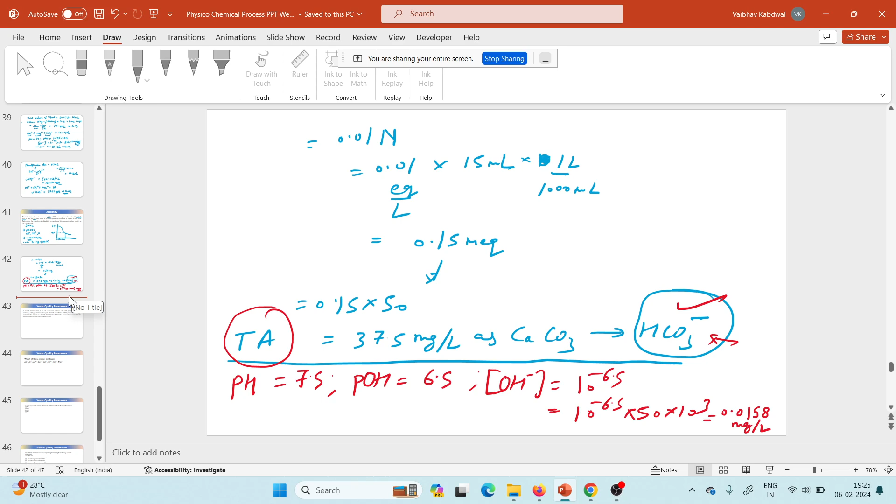So do you know what BOD is and how to calculate it? I am not aware of calculating BOD, sir, but I know it's biological oxygen demand - the amount of oxygen required to decompose organic matter by microorganisms.

Correct, you told it correct, but its proper name is biochemical oxygen demand. So for biochemical oxygen demand we do the BOD test. Are you aware of it a little bit? I am aware of COD - chemical oxygen demand - but I don't know about BOD, sir. Correct, I will tell you what BOD is.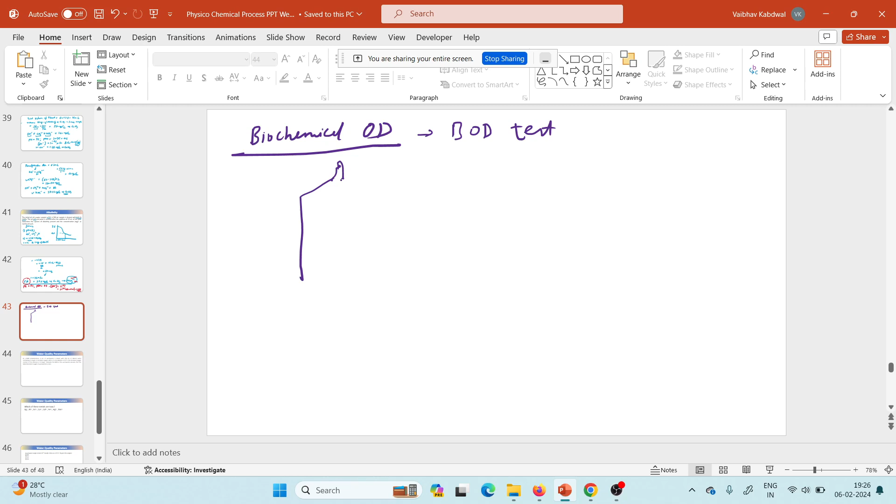So in the BOD test, we take 300 ml bottles. BOD means oxygen requirement - how much oxygen is required for the decomposition of organic matter by microorganisms in the water sample is called biochemical oxygen demand. So if we just keep the water sample, the water will be devoid of oxygen.

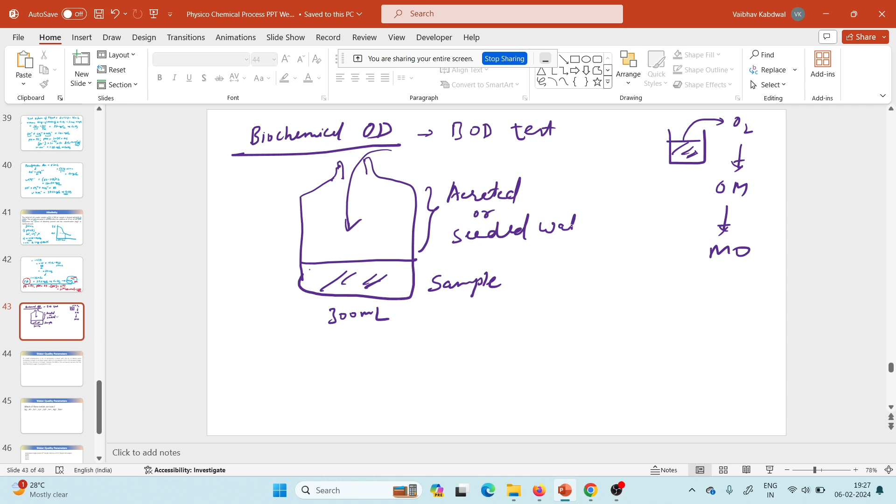So what we do is take some amount of sample and dilute it with aerated water, and sometimes seeded water. We take the water sample - let's say we have taken sewage - and mix it with aerated water so that we get to know how much oxygen is consumed by the microorganisms present in the sewage.

We check the initial DO - do you know about DO, dissolved oxygen? Yes sir. We check initial DO, that is called DO initial. Then after 5 days we check the DO again, that is called DO final. Then we subtract DO final minus DO initial. That demand difference is due to the whole water.

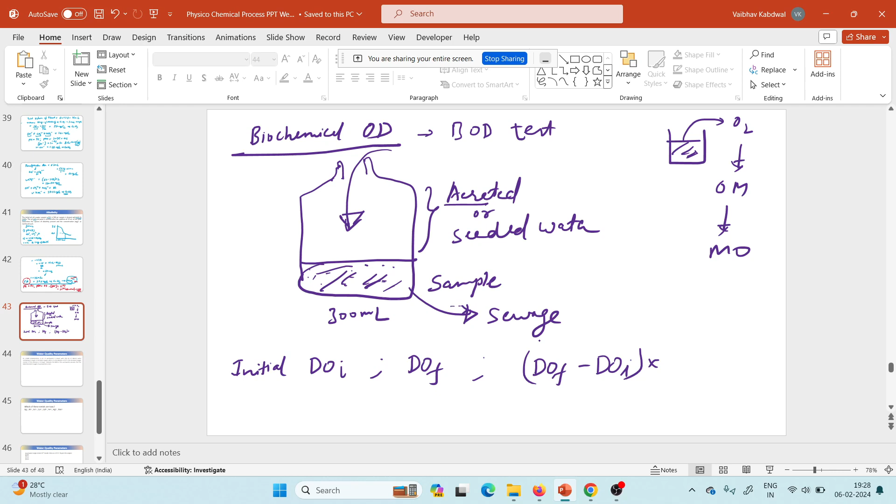But we need to calculate it for the sample only, so we consider how many times we have diluted it. The sample bottle size is 300 ml, so 300 ml divided by x ml - this will be the BOD.

So generally the BOD test is done for 5 days at 20 degrees Celsius.

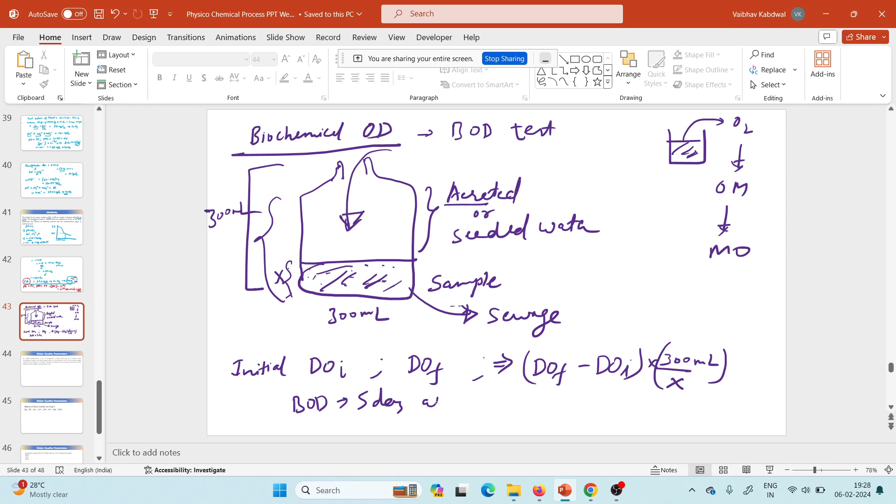So we will solve it. It is a very easy question.

In a BOD determination, 6 ml of wastewater is mixed with 294 ml of diluted water containing 9.1 milligram of dissolved oxygen. So initially, 6 ml of wastewater is taken and mixed with 294 ml of diluted water. This mix has an initial DO of 9.1 milligram per liter. After 5-day incubation at 20 degrees Celsius, the dissolved oxygen content of the mixture is 2.8.

So what will happen after 5 days? The microorganisms present in the sewage sample will consume oxygen from the water, and the oxygen content will reduce. So the oxygen of this mix after 5 days will be 2.8 milligram per liter.

So BOD for 5 days will be 9.1 minus 2.8, into 300 divided by 6. How much will be the answer? Can you calculate?

335? Let me check. 9.1 minus 2.8 into 300 divided by 6 - is it 335 or 315? Just a minute, cross check it again... it's 2.8, it's 300. It's 315. Yeah, correct, correct.

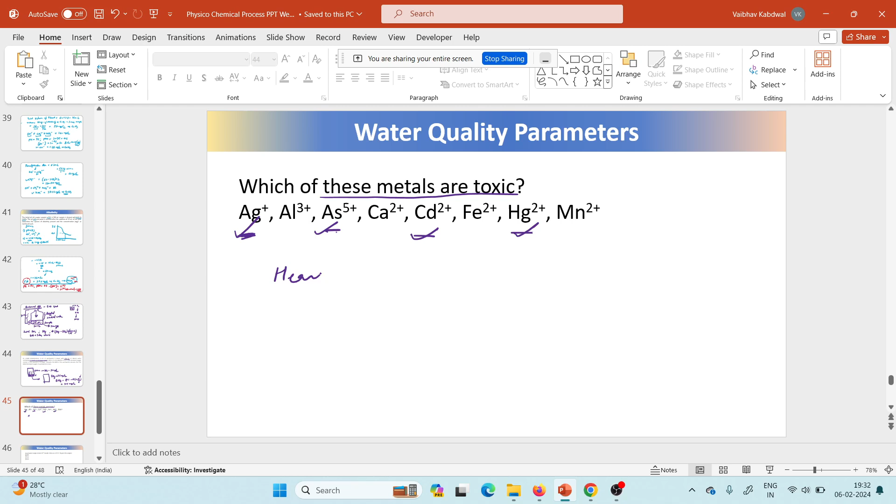Shall we start with the new question? Which of these metals are toxic? Mercury, cadmium, arsenic, silver - these are all toxic heavy metals. Their presence even at low concentration is toxic. Aluminum, calcium, iron, and manganese are not toxic actually.

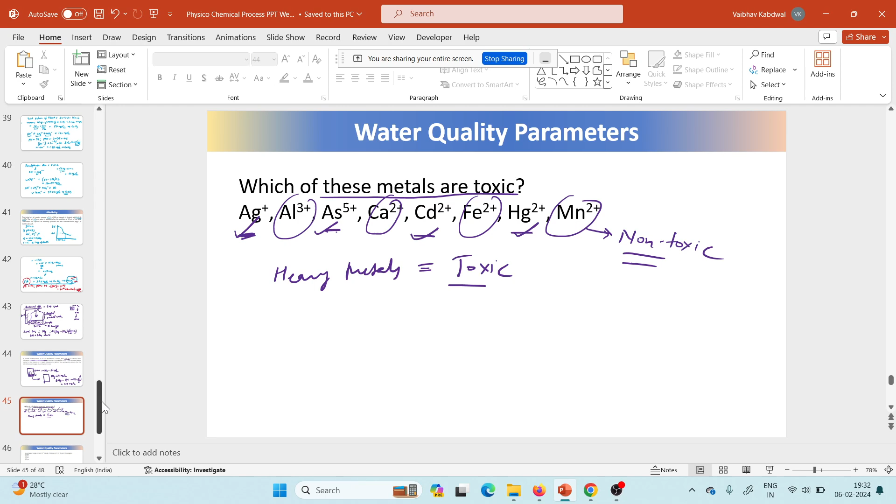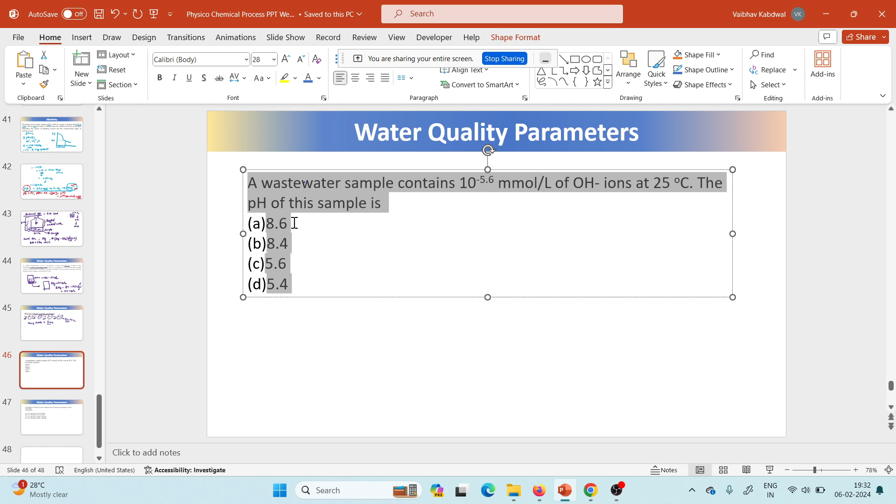So this question is about pH, are you aware of it? A wastewater sample contains 10 to the power minus 5.6 millimole per liter of OH minus ions at 25 degrees Celsius. The pH of the sample is?

So what is the question saying? The OH minus ion concentration is given. Like 8.4? But the answer is not 8.4, it's 5.4. How did you calculate? It is given in the question - he has given OH minus ion concentration.

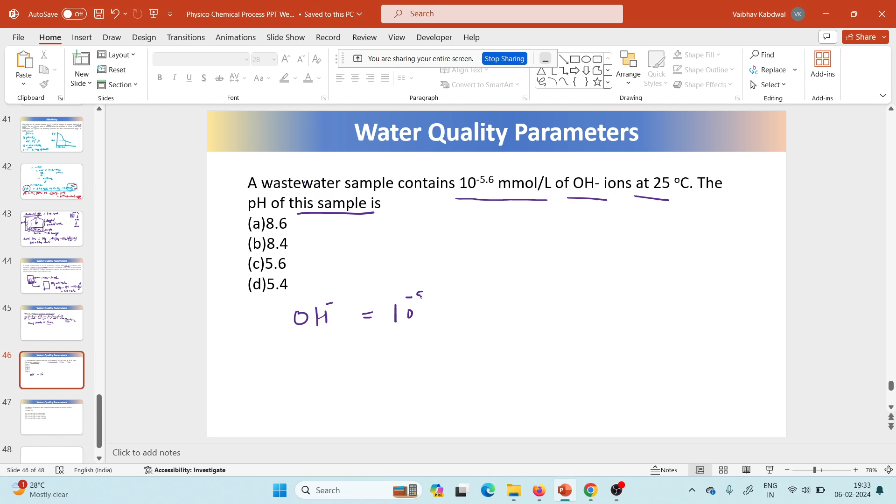You need to calculate H plus like this: plus 8.6, and it will be 10 to the power minus 5.4 for H plus. If you solve it, you will get pH 5.4. So the correct answer is 5.4.

Done. Can we start the next question? Yes, sir. This is the last question I have for today - if you have a few more questions, we can discuss that. So this is based on alkalinity and hardness. The alkalinity and hardness of a water sample in milligram per liter are 250 milligram per liter and 350 milligram per liter as CaCO3.

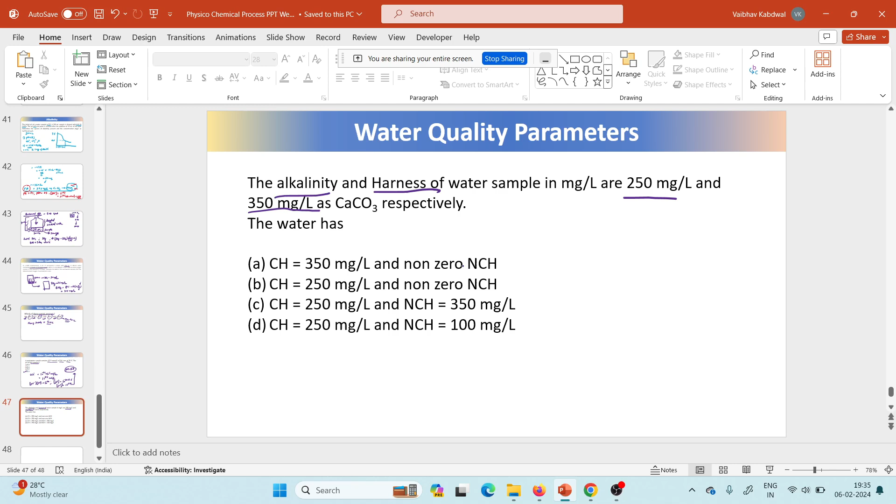So the MCQ asks how much is the carbonate hardness or non-carbonate hardness - these are all the options. Basically, you need to calculate carbonate hardness and non-carbonate hardness. Can you calculate it?

Okay, shall I start this question? So alkalinity given is 250 milligram per liter, and hardness, writing it as total hardness, is 350 milligram per liter. So the question is asking what is the carbonate hardness and non-carbonate hardness.

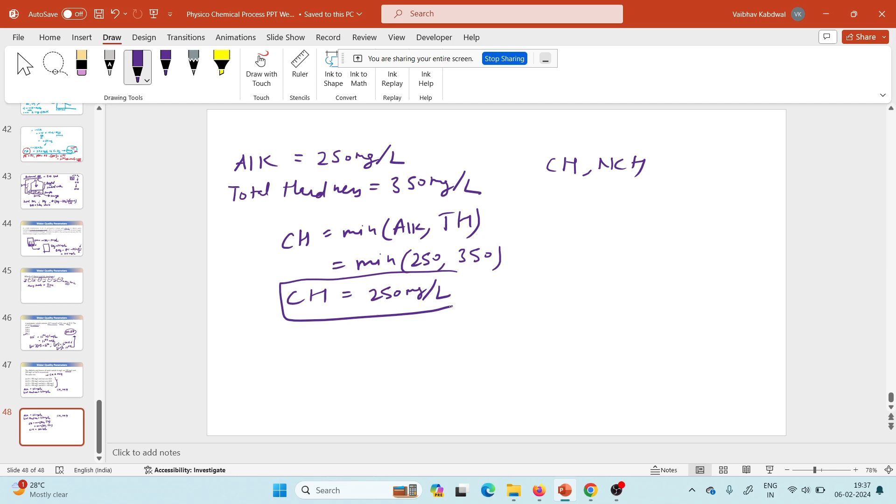So we know carbonate hardness is the minimum of alkalinity and total hardness. So carbonate hardness is minimum of 250 and 350, so it will be 250 milligram per liter. And total hardness is 350 milligram per liter. We know total hardness equals carbonate hardness plus non-carbonate hardness, so non-carbonate hardness will be total hardness minus carbonate hardness: 350 minus 250, which is 100 milligram per liter.

So which answer will be correct? Carbonate hardness 250 milligram per liter and non-carbonate hardness 100 milligram per liter. So option D will be correct.

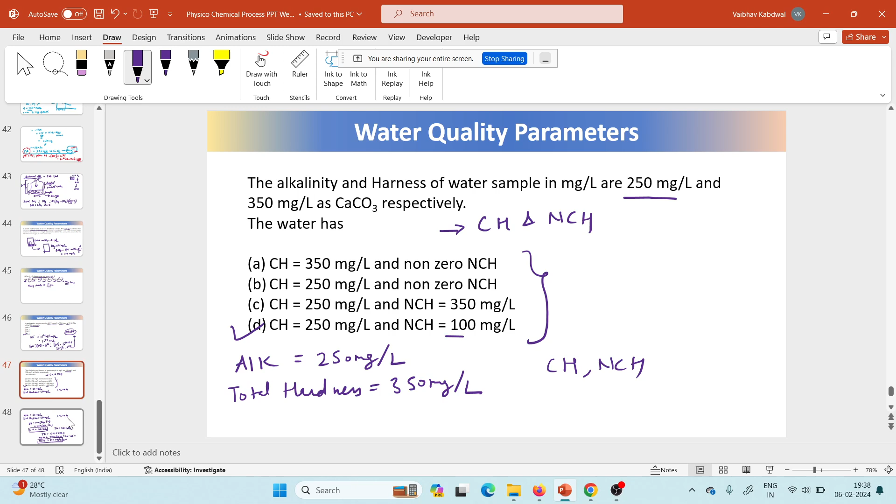So this was about today's session.